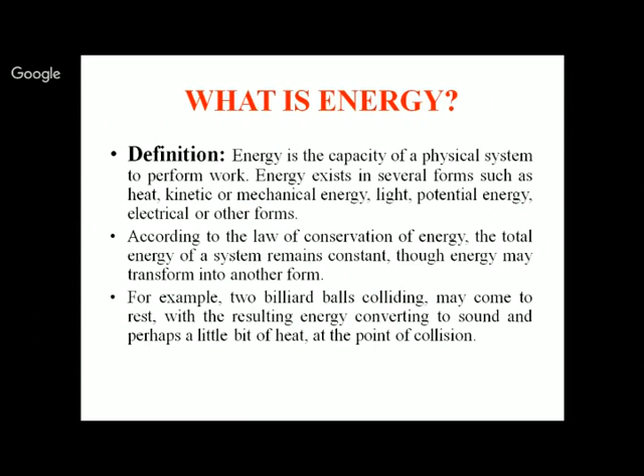Now the types of energy. We have the mechanical energy that we use every day, and even ourselves, we perform various types of mechanical work, and those are controlled by our brain. Mechanical energy results from movement or location of an object. Now the thermal or heat energy reflects temperature difference between two systems. If there is a temperature difference between two bodies, heat transfer normally takes place from higher to lower temperature.

Nuclear energy is also one of very high energy capacity; uranium, plutonium, and so many things are very much in demand for power generation, medical sciences, etc. And chemical energy, in chemical reactions, we have endothermic and exothermic, where energy is being released or absorbed. So the role of chemical energy is very important. And electromagnetic energy is in the form of light or some other forms.

So why is energy efficiency and conservation to be taken care of in all respects? Because the total global reserves of oil are not going to last for more than 30 or 40 years. The resources that we have, whether solid like coal, liquid petroleum, or gases, are limited in nature. So when we are consuming, someday it will be finished. So we must find something alternative which is available, free, and abundant, and convert that energy for the purposes served by the solid, liquid, or gaseous energies we have been using for many years.

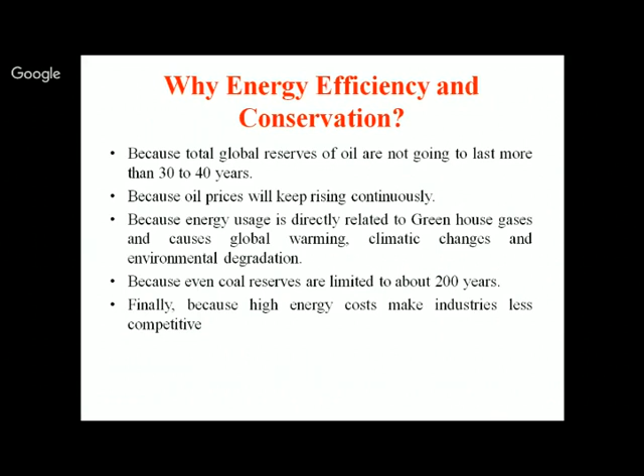However, in the southern area, there is a huge application of wind power energy. So these two, solar as well as wind, are now the alternative energy that can be thought of in place of solid, liquid, and gaseous energy resources.

Now the energy management, why energy management is required and how it is defined. This is basically the strategy for adjusting or optimizing the energy use. So using energy, we need several types of strategy. Suppose in our houses, most of the time we are sitting in one room or working in one room. However, other rooms are also lighted, or the corridors are lighted, having no use at all. So this is basically the wastage of energy. So wherever some use is there, there should be the light.

So to reduce the energy requirement per unit of output while holding constant or reducing total cost of producing the output from this system. That means if we reduce our requirement, naturally the output to be produced from the source, whether it is thermal power, hydel power, nuclear, or whatever it may be, their requirements will be less, and there will be less degradation as well as less consumption of the basic fuels like solid, liquid, or gases.

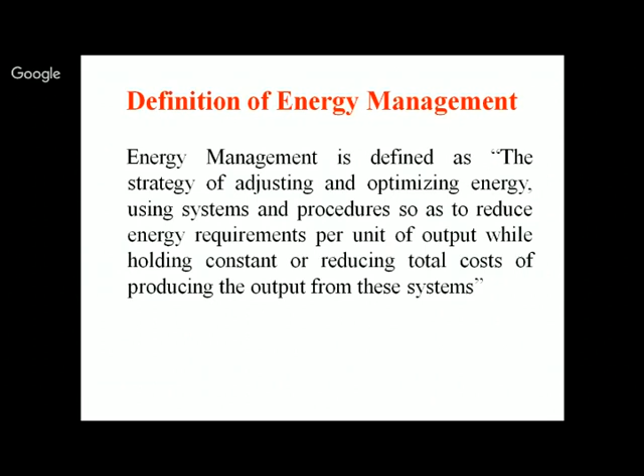So therefore, energy management is basically confined to the situation where we have to plan some strategy and optimize the energy use. So what are the benefits of energy management? First is the saving in terms of economics, in terms of environment, in terms of manpower, in terms of many more. Moreover, the maintenance is also less. Suppose we take a solar power plant. It has less maintenance as compared to thermal and so on.

And reduced noise level. Noise is also considered as a pollution. Suppose you see the hydropower plant or the thermal power plant or the nuclear power plant. There a lot of noise is coming. So noise is also being reduced. From a health point of view, that's a better thing. Again, indoor air quality.

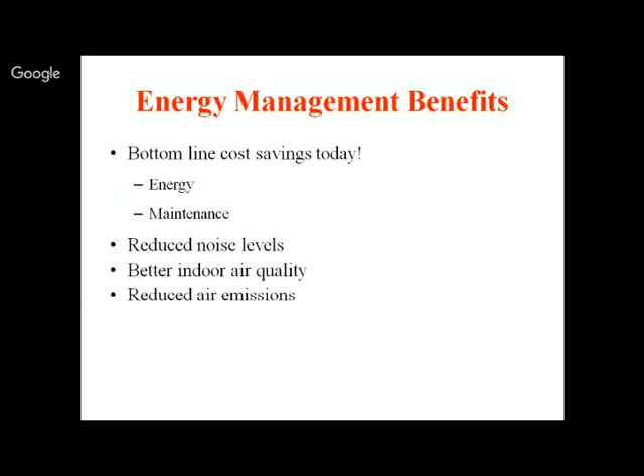So air quality is also very much important because the pollution creates some health hazards, and those health hazards cause the loss of lives as well as economic losses. And emission in the air of CO2, NO2 and SO2. Again, it is related to health as well as consumption.

Now, energy management systems. So what to do and how to do. There are two things. One is technical, another one is non-technical, because technical people can understand the technical things in a nice way. However, the non-technical things can be understood by a non-technical person also. So first thing is that at the managerial level, the management requires certain things like policy, goal, target, resources. Those are the plans for how to implement the energy requirement and the minimization of its usage.

Now doing the things, what to do: we should impart the training, communication, control equipment, systems, processes, and corrective checks. Corrective checks means, if these things have been implemented, whether the improvement has taken place or not. Now the internal audits, that means it should be audited, comparing the earlier energy consumption and the present situation, what is the advantage in the energy audit.

And now the management review: the management should review whether whatever has been planned, done, and checked has been successfully implemented or not. So these are the managerial steps basically. And now we have the technical point of view. It has similar kinds of points like plan, energy data management. That means if we have the past history of the energy data, energy use analysis, as well as energy generation analysis, as well as the fault analysis and its assessment, then we can plan in a better way what to do technically.

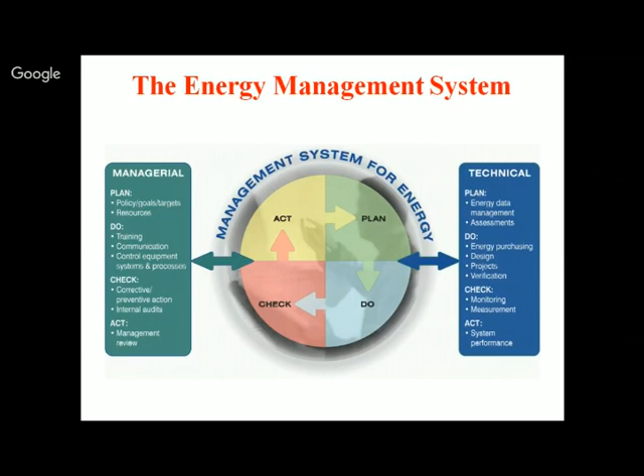So basically the energy management system requires the plan, do, check, and act. So this is a cyclic process. It's a cyclic process in terms of technical as well as managerial, both ways. That means one is technical, another one is the managerial kind of features. So this should be taken care of for energy management.

So objectives of energy management: to achieve and maintain optimum energy procurement and utilization throughout the organization, whether it is buildings, offices, or industries. So every building, every house, every industry should plan for energy management, how to achieve and maintain the optimal energy requirement through procurement, utilization, auditing, and data assessment, like this.

To minimize energy costs and waste without affecting production and quality. An industry cannot have shutdown type of characteristics at any cost, because that will put the industry in a loss. So it should be kept in mind: energy cost as well as waste, without affecting production and quality. So quality as well as production should not be hampered. That means our household or office building should not be hampered at any cost, its working, its output, apart from minimizing or optimizing the energy use.

Now, minimize the environmental effect. So environmental is one of the very important ones. Today a lot of things have been done in these areas for global warming as well as pollution control. Recently in Delhi, the odd-even formula has been introduced to reduce air pollution as well as reduce the consumption of fuel. So it's a multi-targeted kind of project where this has been taken into action.

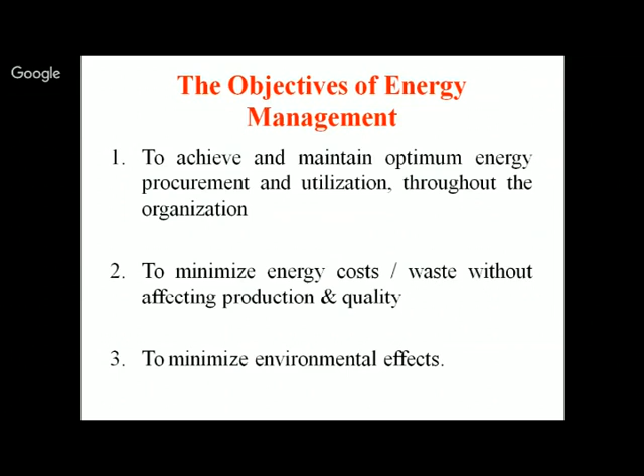Now, energy management objectives clarified. The basic objective of any energy management system is to answer 5 simple questions: how much energy is consumed, how is the energy consumed, where is energy consumed, when is energy consumed, and what is the quality of energy consumed. So these 5 things are very important.

That means how much energy is consumed. That is a very good idea: we have 7 days, and out of 7 days we have 24 hours in each day. Okay, so we can plan that as per our requirement. Out of 7 days, Saturday and Sunday are normally observed as holidays. So what is their planning? And the rest, Monday to Friday, are the working days. So you will naturally find a change either in the house, in the official building, or in the industry.

So all these 3 sectors have a different consumption, as well as their time, and you can understand it like a load management curve, that within the 24 hours the energy demand is varying. However, somewhere it may be constant also. So we can plan our energy requirement, and say how much energy is required at this moment.

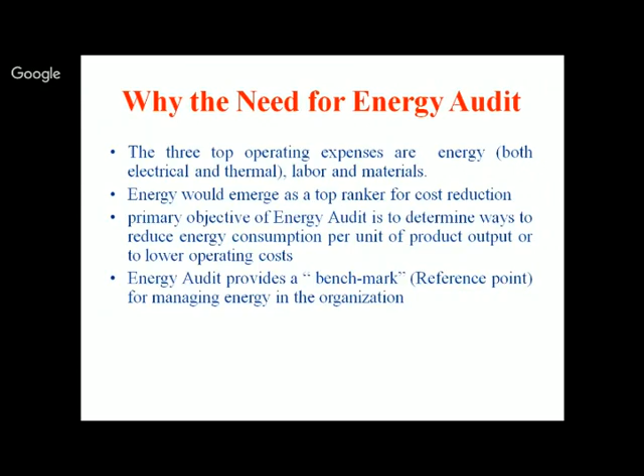Now the energy audit. Basically we have three types of energy audit: the preliminary energy audit, targeted energy audit, and detailed energy audit. The preliminary energy audit is just like a walkthrough. That means walking from one place to another and making a lump sum observation of what is happening in the building, offices or industry, keeping in consideration that if you manage or improve those things, certainly your energy requirement will be improved.

So basically the preliminary energy audit uses existing or easily obtained data and establishes the energy consumption in the organization, getting information regarding energy use and scope for saving. It identifies the most likely areas for attention, that is, the place or sector where the most attention should be paid. It identifies immediate no cost or low cost improvements, and sets the reference points.

The reference point is very easily set because there is a set table and you can measure immediately what the lux requirement is, and you can go to different rooms or places and say, here is more, here is less. It also identifies the areas for more detailed study and measurement. That is also a part of the preliminary energy audit.

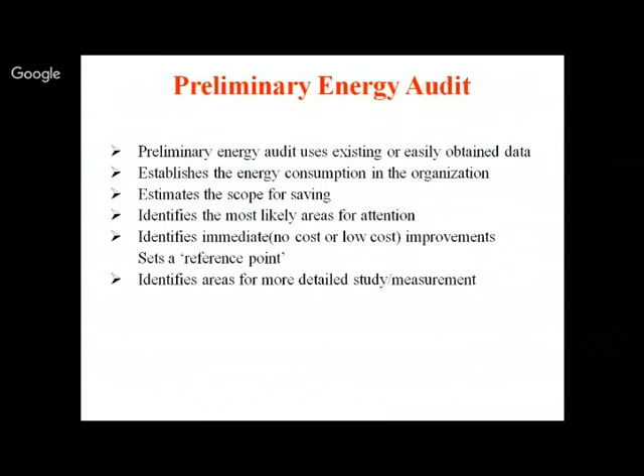Suppose you have to go for the detailed energy audit, that means you have to check each and every piece of equipment, each and every device, whether the devices are properly rated or not, whether their energy efficiency is correct or not. So the preliminary audit simply identifies the area where the detailed energy audit is to be performed.

Targeted energy audit, that means there is a targeted place or targeted equipment where this energy audit is applied. Suppose we have 5-6 sectors or 5-6 places, but we target certain points, or the consumer says that I have more consumption in this sector, you advise on this sector or this place how to reduce. So this is a targeted kind of thing.

So targeted energy audits are mostly based upon the outcome of the preliminary energy audit. That means in the preliminary audit they identify where the target should be made to further improve the energy use. They provide data and detailed analysis on specified target projects. An example, an organization may target its lighting system, boiler system or compressed air system with a view to bring about energy saving.

Now, in a sector, suppose in every sector there is a requirement of some lighting system, heating system, cooling system. So they can say that I need improvement in the heating system. So the energy auditor will only go for the heating requirement and its performance improvement and the energy use analysis. Similarly, they can go for the compressor, only the compressor. Suppose they have some motors, so they can go for the motors. So this is the targeted one.

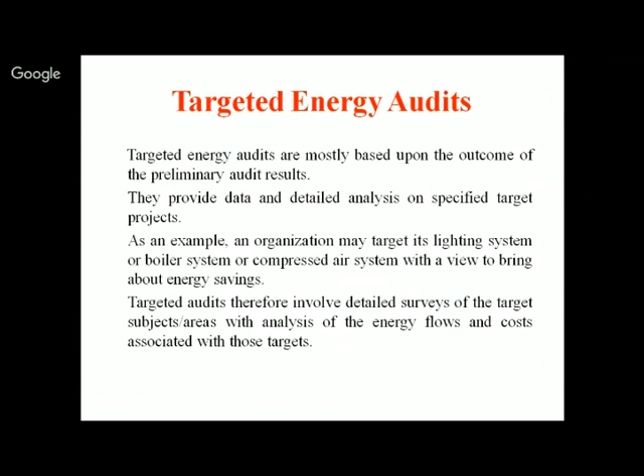So targeted audits therefore involve a detailed survey of the targeted subject area with analysis of energy flow and costs associated with that target area, and the energy auditor or the manager can suggest further improvement for reduced energy and cost through advice or recommendations.

Now the detailed energy audit. A detailed energy audit evaluates all systems and equipment which consume energy, and the audit comprises a detailed study on energy savings and the cost. That means a detailed energy audit is related to each and every equipment in the houses or in the offices, because suppose you have 10 PCs in an office, and you will find that some of the PCs are LCD based, some are CRT based. So certainly the CRT based ones will consume more power.

Okay. Now similarly, suppose 10 PCs. They simply count 10 PCs, that is 125 multiplied by 10. This is not the correct one. One should go through proper measurement of how much energy is being consumed by operating each individually. Then you will find that yes, this PC is consuming more power, either it should be removed or replaced by a new one, or some parts replaced, like replacement of the CRT may simply save a lot of energy. So this is a detailed kind of energy audit.

Now the detailed energy audit is carried out in 3 phases. That is pre-audit, audit phase and post-audit. In the pre-audit phase, before conducting the audit, certain documents are required. That is your past few years, like 2 or 3 years of documents, like energy consumption, your billing, your maintenance, your faults. All such information is required in advance, so that the energy auditor or the manager can make a target point where the possibilities are, and then plan the audit phase based on the available documents.

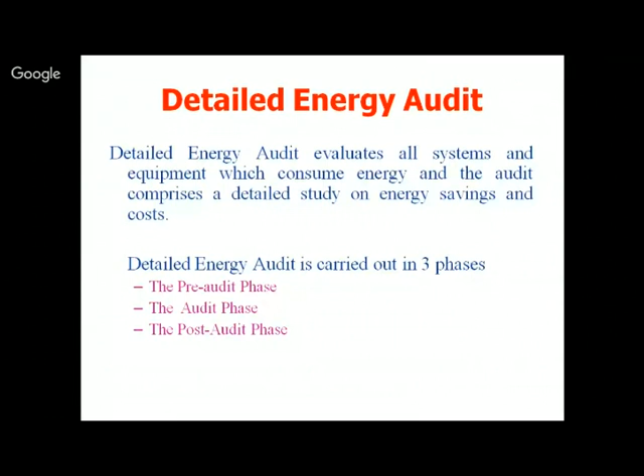Questions which an energy auditor should ask. Now again, very funny kind of things. When I was doing some energy audit in Chandigarh, in one very big office, I asked the peon when this office is being opened. He told that at 8 a.m. When is this office becoming operational? He said 9:30. Before that, all AC is going on, light is on, fan is on, like this. If you ask this question to the officer sitting there, he will never say.

So there are certain questions that should be asked in a confident manner to the person who is involved to make certain kind of savings. There is a huge saving like this. So here are certain points. However, there is a large number of questionnaires, about 50 questions or more than 50 questions, even 100 questions may be asked from the consumers to save their energy. So few of the questions I have been putting here.

What function does this system serve? That's the question. That means for the system or the equipment you are using or consuming the energy, you should also know what function this system serves. How does this system serve its function? What is the energy consumption of this system? What are the indications that this system is working properly? If this system is not working, how can it be restored to good working condition? How can the energy cost of this system be reduced?

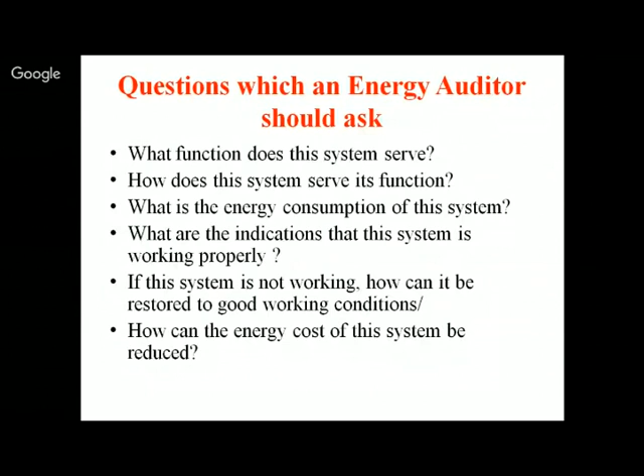Now to the energy lab. At very few places is there a lab like this; I have set up this lab of more than 50 lakhs. It is established in PEC in our Department of Electrical Engineering in the TEQIP project, Technical Education Quality Improvement Program, funded by World Bank. So this lab has various complicated and costly equipments for the study of energy use analysis, for energy auditing, for energy management, and for research purposes. Our ME and PhD students are also using it. So some of the instruments are shown here,

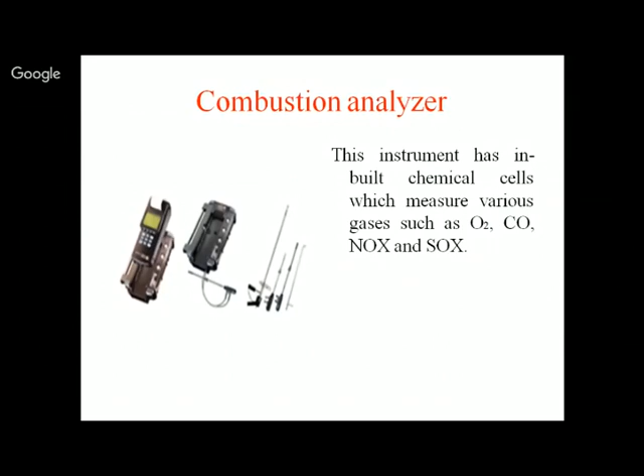like the combustion analyzer. Suppose you think about a thermal power plant, where coal is normally burned, and the emissions have O2, CO, NOx, SOx. These are poisonous gases, and those are harmful to the environment. So the analysis of these gases, how much PPM, that is, how much pollution is being injected into the atmosphere, is done using this combustion analyzer. So it has various kinds of sensors.

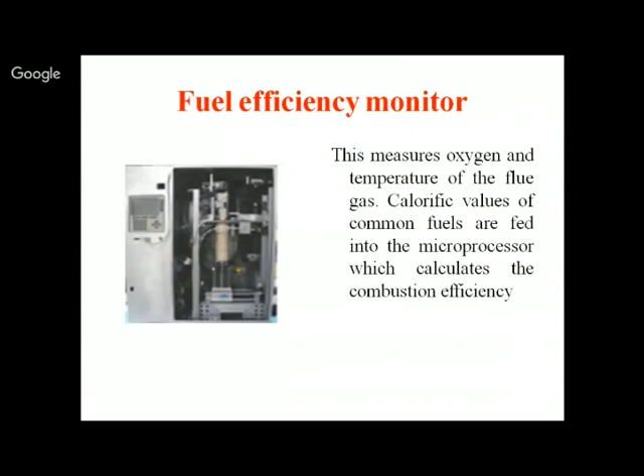Through these sensors, they are detecting the percentage. Now you have the fuel efficiency monitor, that is, calorific values of the common fuels are fed into the microprocessor or the computer system, and it calculates how much efficiency, because you know coals are also available in various types. Some of the coals give more energy and some of the coals do not give more energy. So again, efficiency is a very important factor, so you can use the fuel efficiency monitor device.

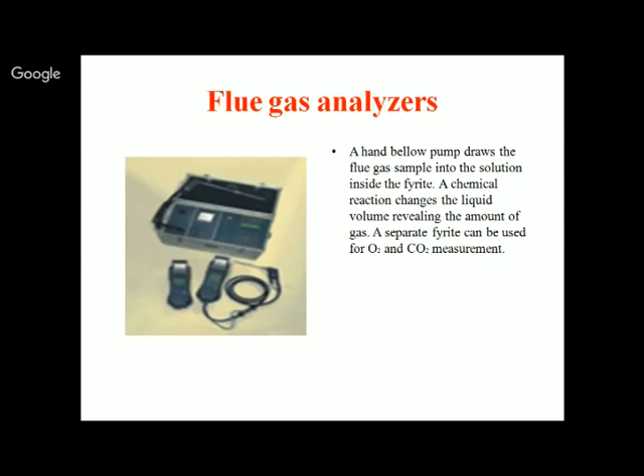Now the flue gas analyzer. This flue gas analyzer is again similar to the previous one. This is also used for the measurement of CO, CO2, O2 or NO2 type of gases. So this is the picture of that. Now the thermometer, that is basically the infrared thermometer. This is widely used in most places by mechanical engineers as well as electrical engineers, because it can tell you the temperature without contact.

Suppose a fan is running, you can simply see the temperature of the upper part of the fan, even the winding of the fan or the condenser of the fan, by simply focusing on it. And you have the image of that as well as its temperature without contact. You can know about short circuiting. Suppose somewhere short circuiting is taking place or some spark is going to take place in wiring that is covered. You cannot see it with the naked eye. However, this IR thermal imager can see. You just simply point it in that direction, the image will come: yes, there is a spark taking place, and what the temperature is.

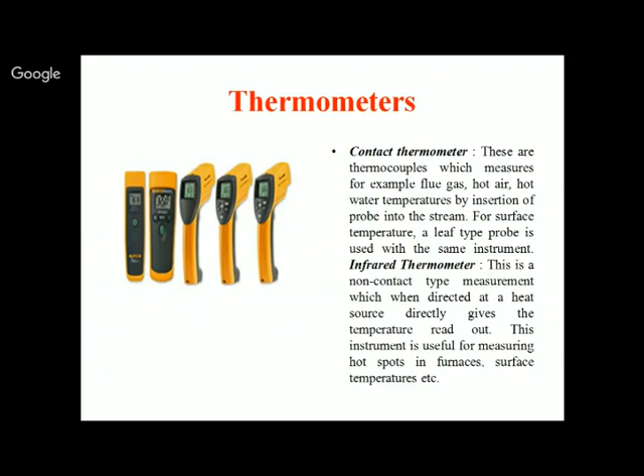That's a very good example. This device has been purchased by me, and last month in December it was demonstrated. This is a very good thermometer. So we have the thermometer also, a small kind of thermometer. So here is the thermometer as well as the thermal imager. It can tell you the temperature as well as its images, which can be downloaded to your PC.

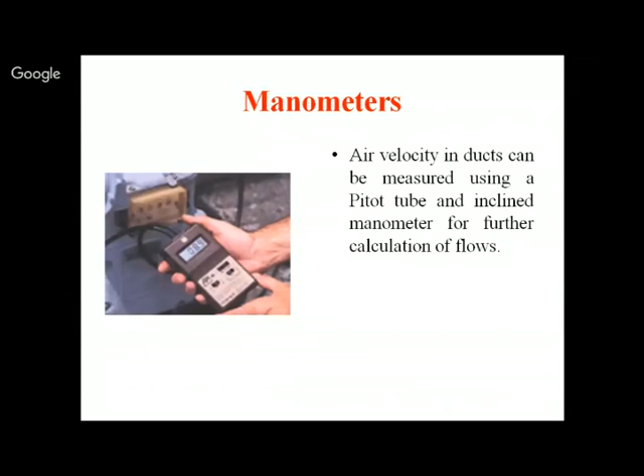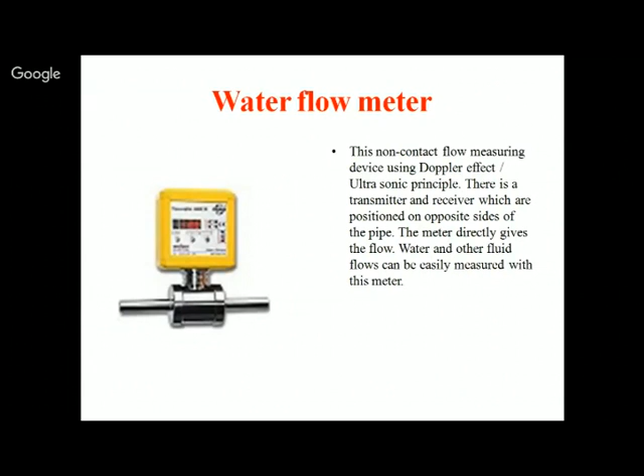Now the manometer. Air velocity in ducts can be measured by a pitot tube, inclined manometer. Again, air is also important. Somewhere air flow, somewhere water flow. This is part of the energy, so it should be measured using this manometer. This is the water flow meter, that's the flow of water. Water is also so precious, like our electricity. So this flow of water is measured through the water flow meter.

Excuse me, sir. Yes. Could you please explain the working of the leakage meter you showed in the earlier slide? Yeah, this is ultrasonic instruments. Hello? How do we measure the leakage? I mean, how do we apply this instrument to our compressor for checking its leakage? How is it working? Actually, I do not have this kind of instrument; it is not available with me, but I tell you that this device detects the leakage of either gas or air.

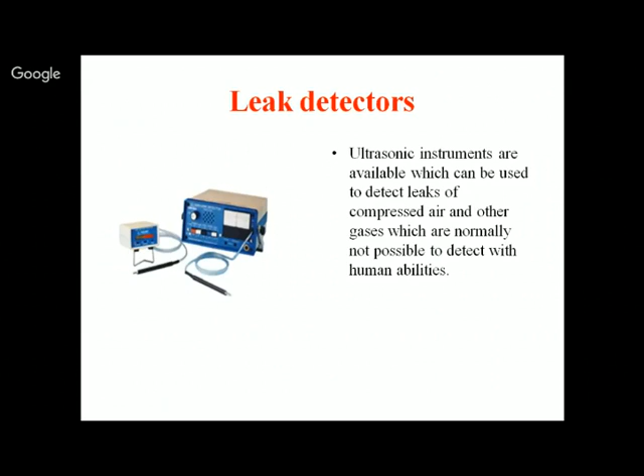And what about these probes that are coming out from the equipment? Could you please elaborate on that as well? The probe has the sensor. Okay, sir. Thank you. Okay. Any more questions?